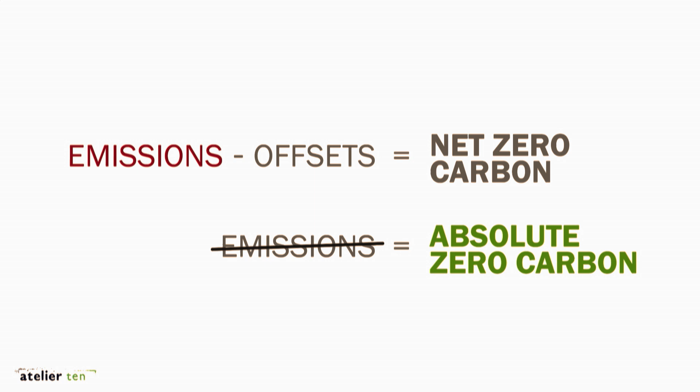What we mean by absolute zero carbon at Atelier Ten is that rather than think about building emissions and then offsets, that might be things like net zero energy too, where you sometimes overproduce and you kind of offset the times where you underproduce on energy, right? You just say, we should have no emissions ever, at any point of time, in building design, through construction, through operations, and no minute of every day, any day, should we have GHG emissions. That's our goal, right? How do we get there? I'm going to show you what I think. But there's a whole lot of innovation needed to get there.

So one of the projects I'm working on is the Stanford Doerr School of Sustainability. So I read John Doerr's book, Speed and Scale, and he talks about FDR's roadmap for winning World War II. And it was a napkin sketch, right? So that little thing in the top corner is the napkin sketch. That's how we won the war. And the idea was if it couldn't fit on a cocktail napkin, it's too complicated, nobody's gonna understand it.

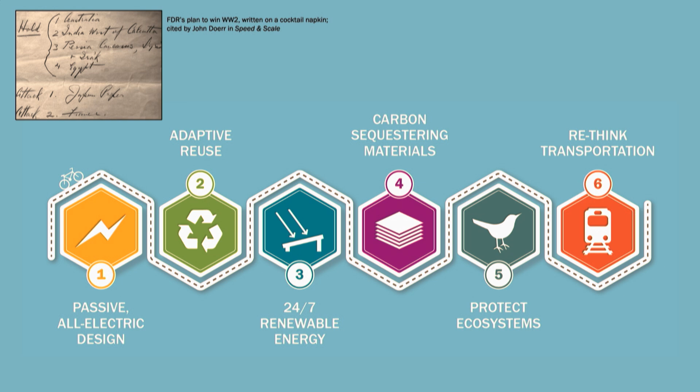So we attempted to make a napkin sketch for absolute zero carbon. It's just 6 steps. It's so easy, guys. Only 6 things to remember, not complicated at all. Of course, for those of us in the building industry, we know every single one of these steps has like thousands of small bits that are needed. We know how complicated it is. But I'm gonna walk you through the 6 steps and how we talk through it.

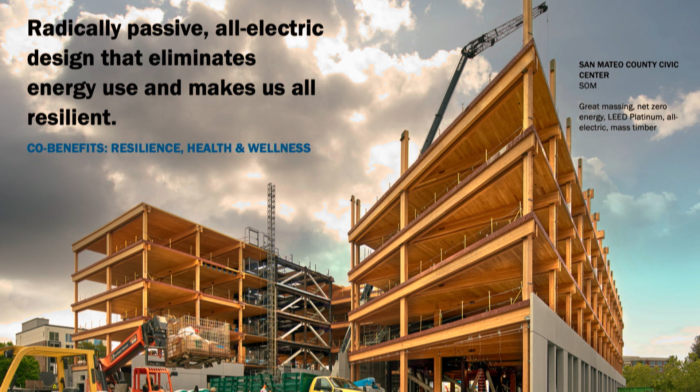So the first step is kind of the easiest one. We need radically passive, all-electric design that saves energy and makes us more resilient, right? We know how to do this, but it is shocking how seldom it happens. Like every architect learns this in school. We all know passive design is the way. Almost none of my projects are set up for good passive design.

So there's economic forces working against us. There's design aesthetics working against us. There's just urban conditions sometimes. But this is the easiest step. So we really need to do it every single time. And when we do this, we get a bunch of co-benefits, which is always my favorite term. Those co-benefits are resilience and health and wellness, better places for people, places that will last for the duration.

So this is very easy to abandon, and when we abandon it, we sort of derail the entire plan for absolute zero carbon, but this is step 1. Step 2 is adaptive reuse that does as well as new construction on operational carbon emissions, so great on energy, and better on embodied carbon.

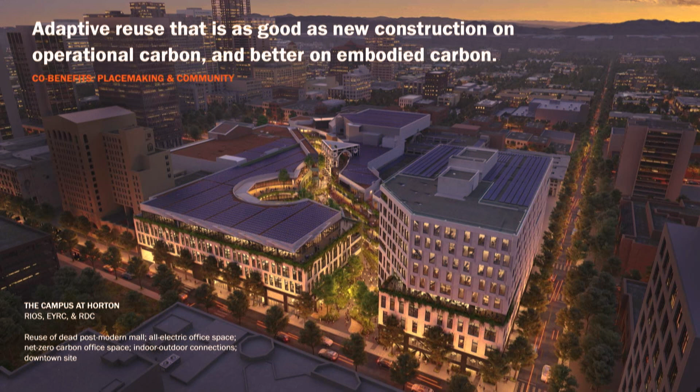This is an example in San Diego. Horton, the campus at Horton, it's an old shopping mall that was repositioned to be tech office space, and then guess what? Tech doesn't want any more office space, so now it's gonna be a lab. But in that process, it became an almost net zero operational carbon project, and we reduced embodied carbon by a huge amount.

And we sort of kept intact a piece of history, right? So the co-benefit here is really around placemaking, and cities as independent places that don't look as generic as they might if they're all new construction, right?

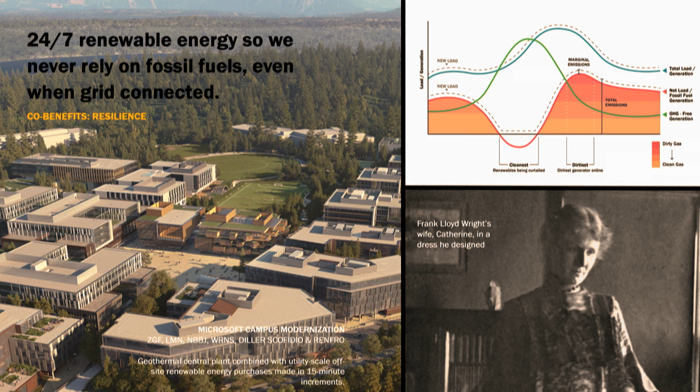The third step, 24/7 renewable energy. So lots of folks are working on this. This is not easy to acquire right now, but the idea is that every minute of every day, you're powered by renewable sources. So you don't sometimes overproduce when the sun is out and sometimes underproduce and call it even. You never use fossil fuels.

So the goal here is really about boycotting an industry, right? If we're ever buying fossil fuels, we are propping up the fossil fuel industry that we wish would go away. So we really, truly need to embrace what it means to not be reliant on them. And that means a transition to a renewable grid, right? We're not going to be able to do it on our own. Buildings aren't on islands. But we need to find a way to design for that future.

And the reason I have a picture of Frank Lloyd Wright's wife up here wearing a Frank Lloyd Wright designed dress is that as designers, we love to get obsessive about the details of our projects, right? If you're Frank Lloyd Wright, you start designing furniture, and then you start designing dresses for the women who occupy your building. That's a whole other talk, right, about the objectification of women. But the point is, we get obsessive about the details.

We need to start getting obsessive about the details of things like our grid connections. It's not nearly as sexy, but it really shows that we're expanding the scope of design from individual buildings and parcels into the infrastructure they touch. We have to take that on as our design project.

Next, we need to protect the functional ecosystems we have and rehabilitate the other landscapes we have into functional ecosystems. So most of them are not, right? I mean, Stanford has an amazing, beautiful campus, but this is not a functional ecosystem, right? Urban projects don't have functional ecosystems. So where we've got them, we need to make sure they stay functional, and where we don't have them, we need to transform what we've got into places where people can be, but also functional ecosystems that can sequester carbon, support our habitats, and be places for more than people.

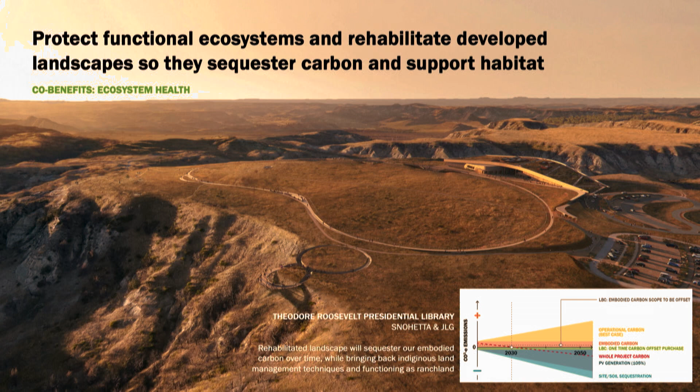And on that landscape, we've got a whole plan about using this site to sequester carbon, to restore native landscape management techniques. So Native American burning techniques will be restored to this landscape that actually fix carbon in the landscape, even though we're burning stuff. It's very anathema to we Californians, but it's gonna work. So this idea that landscape is part of our carbon cycle, it's part of the habitat for creatures who are not us. We need to really take that on as a serious project.

Transportation is a little hard to figure out where to even begin, right? So I said, serious attention to transportation. As project designers, we often are not involved in site selection or choosing where our buildings are located, but we kind of need to wrap our arms around that too and take responsibility for it.

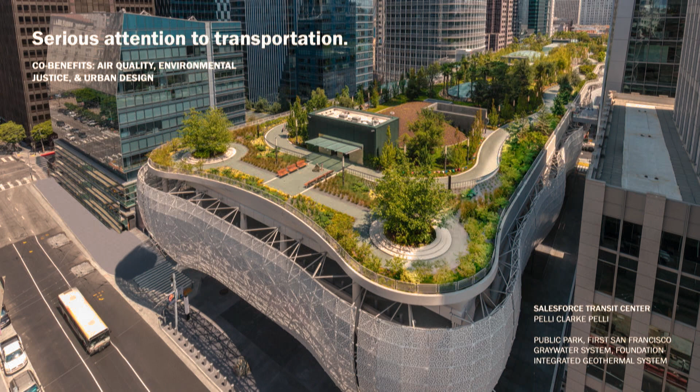As our transportation infrastructure gets electrified, the entire energy backbone of our vehicles is happening in our buildings. So we are designing that backbone when we design the building. The cars are literally plugged into the building to charge. So that's our energy use now, our carbon footprint. And there's some amount of interactivity that's being explored, right? Vehicle battery to building, back and forth may be an option. Obviously, site selection and mass transit options are really important parts of our project, but we've got to take that piece of the carbon pie as our own as well.

And then possibly the hardest one, it's the one I'm going to go into a little bit more detail about, is we need zero embodied carbon materials and carbon sequestering materials. So this is not ready for prime time. We don't have buildings that are capable of doing this yet, but we need to prep ourselves so that by 2050 we can.

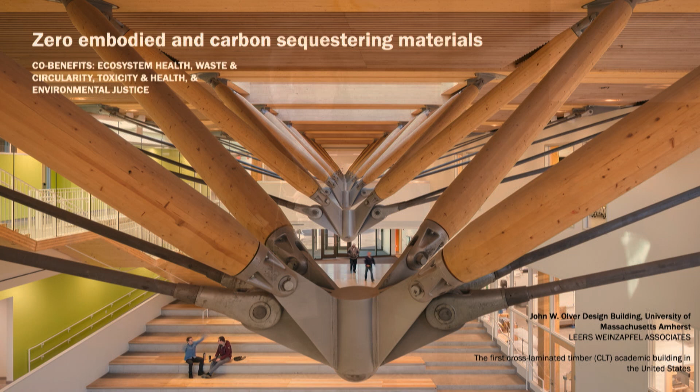In general, in the sustainable materials world, the carbon sequestering materials we have are, I'm going to call them, kind of some hippie shit. They're like blue jeans insulation and sheep's wool stuff. These are things that have not made it to the commercial buildings market. We need the next generation of those materials. And the analogy I always use is that we don't need the lentil loaf of materials, we need the Impossible meat of materials. Highly engineered, yet carbon sequestering, bio-based materials.

There's all sorts of cool stuff getting researched right now. Very little of it has made it to market, and buildings are slow, man. We've got to go through this whole process of those things coming to market, and then we pilot them, and then we convince ourselves they'll last for a long time. It's a really slow process, so we've got to get on that process this minute.

So this roadmap illustrates, right? I've talked about transportation, the grid, materials. Why on earth would we talk about buildings here? I think buildings are the key. I'm a building designer, but I also think buildings have this really unique quality in that they're connected to all of these pieces of infrastructure I just mentioned. Back in the day, you used to see a lot of innovation happening through cars, right? Things got small because they wanted to get put into cars.

But buildings are connected to everything I just mentioned, right? Transportation, ecosystems, materials, electrical production, municipal water supplies. All of these things come together in buildings. So buildings become our lever for change. If we can design buildings to be different, we can reach our influence out into all of those other systems and get them to change along with us. So I think buildings are actually an incredibly powerful tool to change all of these systems.

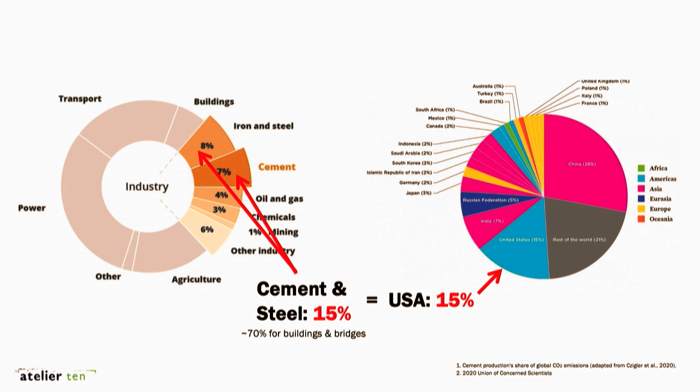So I'm going to talk first about material supply chain. Let's talk about the big ones in buildings: concrete and steel. Concrete and steel account for 15% of global GHGs. So does the United States. So if we could fix concrete and steel, we could basically offset the entire US greenhouse gas footprint, which is highly problematic, right? So that's a huge amount of agency that the folks in the buildings world have. About 70% of that cement and steel is used for buildings and bridges, but not other forms of infrastructure. So we have a lot of power to transform a huge portion of the global footprint.

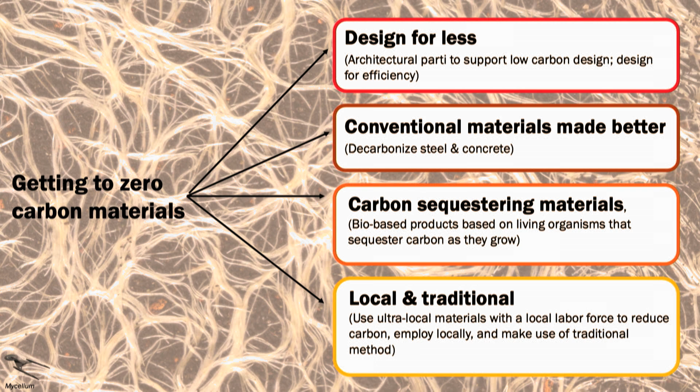So what are we going to do to get to zero carbon materials? We have a couple options at our disposal here. There's design to use less. We can make conventional materials better, like concrete and steel. We can invest in carbon sequestering materials, as I mentioned a moment ago. And we can think harder about what it means to use local or traditional materials. So I'm going to talk really quickly about each of these.

So design for less. I am an architect. I love architecture. And yet, the era of the heroic cantilever needs to end. These buildings use too much carbon. It's just simply irresponsible, right? And that's a really controversial thing for me to say. Much of my work is with starchitects who make iconic projects. I believe in the power of iconic projects. But we have to take a look at what that implication means for the carbon world.

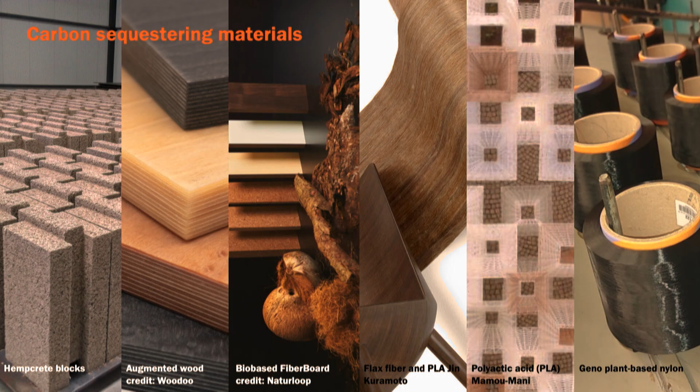I mentioned what I think about these carbon sequestering materials, right? There's all sorts of, in particular, wood-based products and algae-based products. In the concrete industry alone, which isn't even bio-based, everyone's trying to look at, could it become bio-based? Can we have algae-based concrete? There's so much cool stuff happening. But it's going to take a lot of work collectively in the buildings industry to find the ones that work and champion them, get them installed on projects, get them the durability seal of approval that we need for buildings, and really get them onto the market. So that's a huge project for us all to take on.

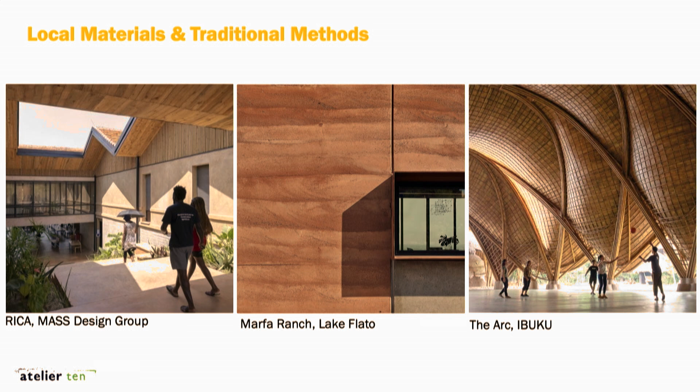Local and traditional materials often are not an option, sadly, in our modern projects, but sometimes they are, and when they are, it's magical. There's really stunning examples of contemporary architecture that take advantage of traditional materials used in local ways. And of course, there's a whole cultural movement behind that, right? About capturing the magic of a place and of traditional materials and employing different folks than are traditionally used in modern construction. So there's a lot there when we can do it.

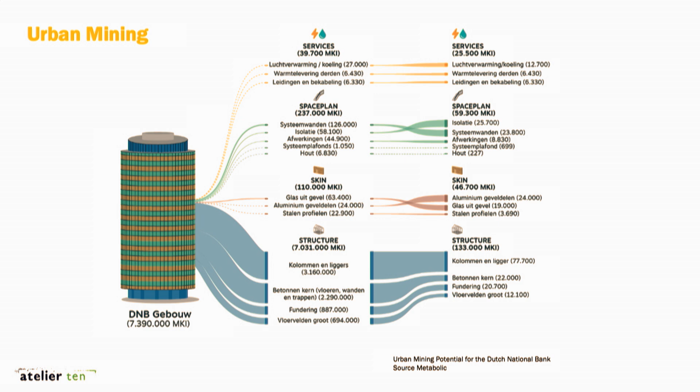And local material doesn't have to mean traditional. Urban mining is starting to be a new idea, right? That we could actually deconstruct buildings and reuse those materials in place, not recycle them, but reuse them. So can I dismantle a building and reuse its steel beams? We're starting to think about material banks that exist in our cities and how those could be repurposed. And then just to make this even slightly more challenging, our materials market is not just about carbon.

It's about waste, about ecosystem destruction. There's a huge health and safety component. There's an environmental justice component. And we have a tendency in the buildings world to solve for one of these problems and exacerbate the others, right? So like, we know right now we're going all electric and investing in PVs, and we know there's a lot of human rights violations happening with certain Chinese PV producers, right? So you can go big in one area and accidentally cause harm in another.

So the challenge before us is to attempt to solve it all at once. We really, between now and 2050, have one shot at transforming the materials market. We can't transform it for GHGs and then be like, oops, we made everyone's lives worse, transform it again. Oops, we caused a bunch of toxicity, transform it again. We kind of have to do it all at once and take that very seriously. It takes a lot of time, it takes a lot of effort. We won't always know the unintended consequences of our materials decisions, but we've got to at least attempt to look at those things holistically. So what does that all mean?

The call to action here is saying, we think buildings are good levers of change. We think we should start prepping for 2050 now and take that as a very serious proposition. We think every building we work on should tackle at least one of these topics, if not more than one. And whatever the heck you learn, share it everywhere because there's so much to learn and to change. We desperately need better ways to share information with each other.

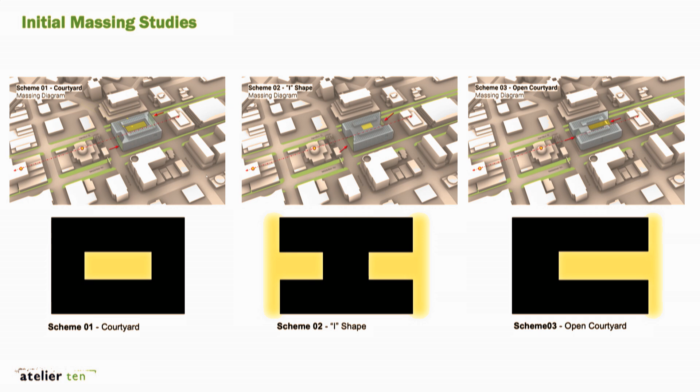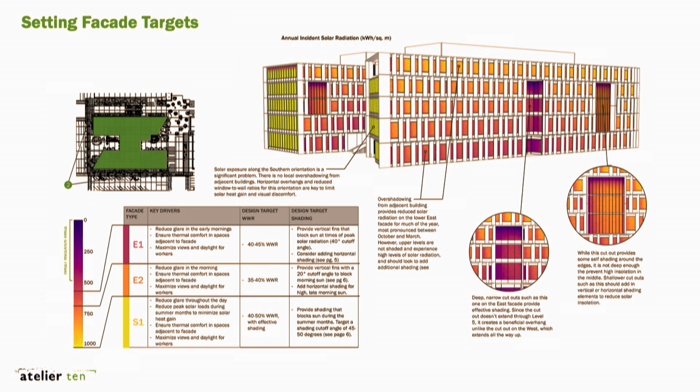We did things like set facade performance targets before our architects started designing. So this very boring table here is like looking at a slate of facades and saying, what should be the facade drivers? How should they perform? Now please, architect, go design something that performs in that way.

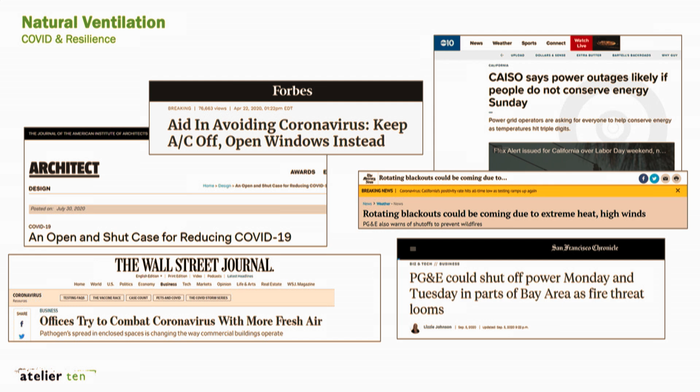We designed this during COVID. So for once, oh my God, we got to naturally ventilate a building. COVID made it very imperative for a very brief period that we have operable windows, right? Everyone has already forgotten about that. But it made it possible to naturally ventilate to save energy, to make more resilience, and in this case, to be a bit more pandemic prepared.

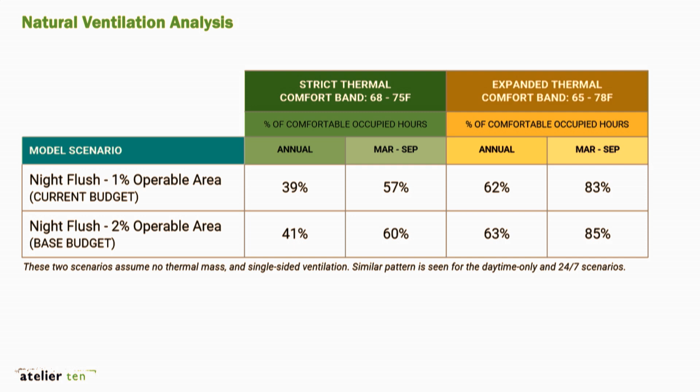So we looked at things like, how many windows do we really need? Can we afford it? Are they automated? Are they manual? Do we need thermal mass or not? In the beautiful climate that is the South Bay, we can naturally ventilate for a huge amount of time. So in our March through September period, 85% of the time we can naturally ventilate. We don't need our cooling or even our fans. It's wonderful. It's still very difficult to get this through projects, however.

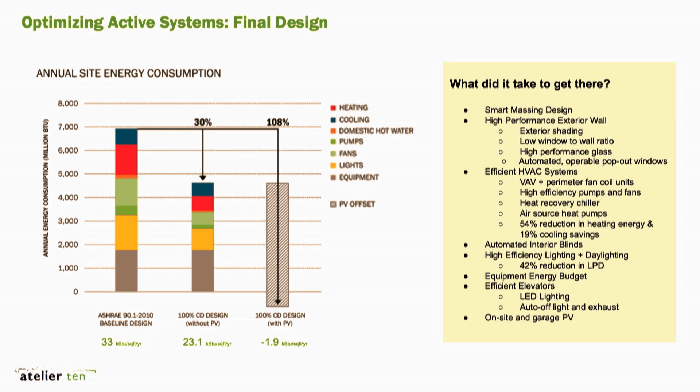We did a bunch of stuff with mechanical systems to make the project net zero. So I'm not going to go through the whole list, but a lot of work on heating, cooling, ventilation, elevators, high efficiency lighting, and so forth and so on to get us to net zero. We spent a lot of time on equipment. So people's computers in the building can take us from being way below net zero to way, way worse than net zero, depending on what equipment they buy and turn on. So we had a whole occupant engagement program to say, you got to use better equipment.